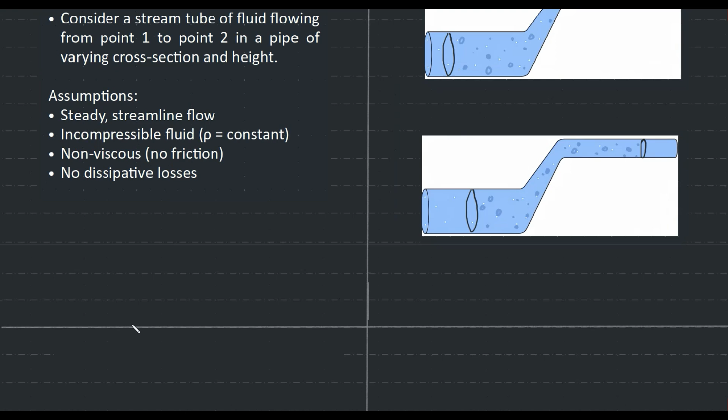So let's look at Bernoulli's equation. We are proving that with the help of the work energy theorem. Let me use this example so that this makes more sense and the transition becomes easy.

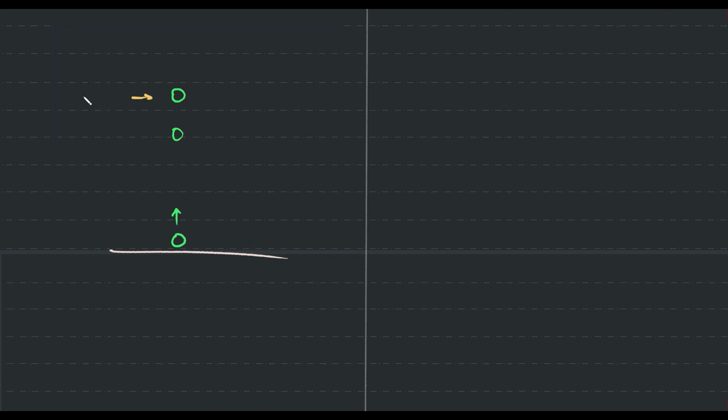So what I'm talking about is throwing a ball up in the air, say on the surface of the moon. This is the top, and this is a journey, it goes up and down. So what is the relationship between kinetic energy and potential energy as and when it moves?

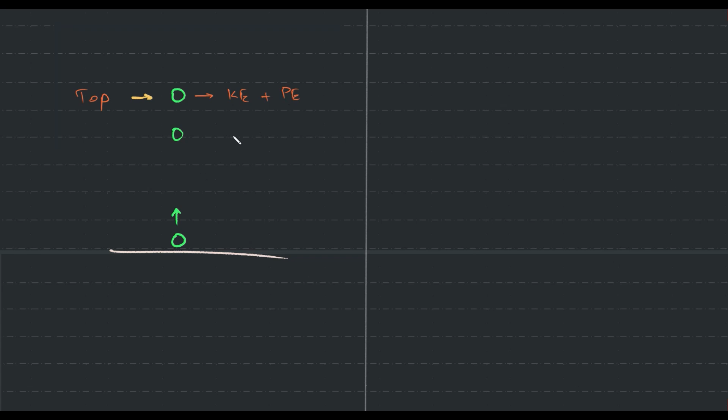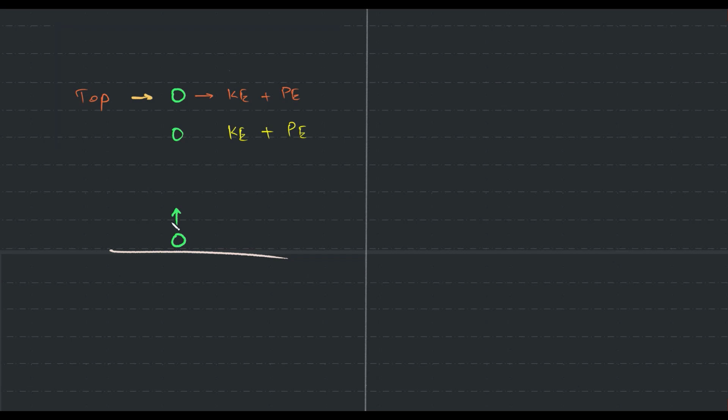Will the kinetic energy and potential energy remain the same throughout? No, right? Individually, they don't. So the kinetic energy value will not be the same at the top in comparison to the kinetic energy and potential energy at any other point. But the total is constant. And this keeps changing, this also changes. Do you guys agree? Do you remember all this?

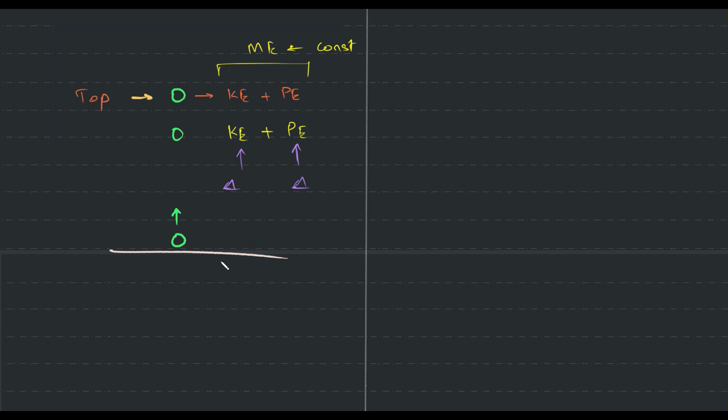Similar to this, okay, extending this idea, we have an ideal fluid moving through a pipe. So here your gravitational force is acting on it, and there is a change in height. And with all of this, you have these particular changes happening, but of course there's one thing that remains constant.

When we talk about Bernoulli's equation, what we are dealing with is an ideal fluid, which is seeing a steady streamline flow through a pipe which is varying in size and height and everything. Okay, guys.

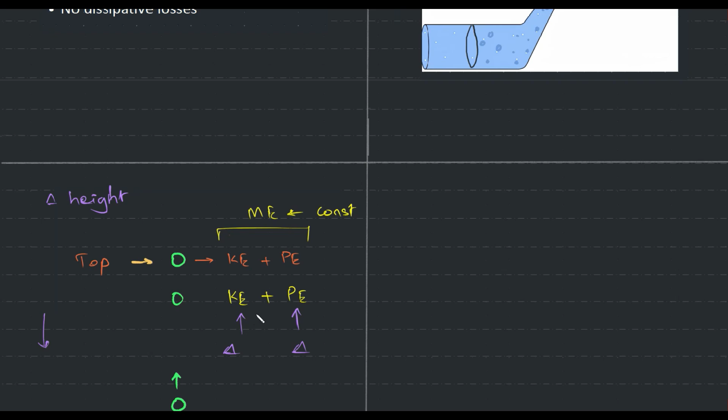So what happens to the energy? Is there an energy form change? Do we see, like here, how we saw the kinetic energy and potential energy increase and decrease? Similar to this, is there an energy form change that we see over here? Relating that is your Bernoulli's equation, and we are proving this with the work energy theorem.

To put it in simple words, say our system is made up of all the particles starting from point 1 to point 2. So this is when you started observing, and this is after some time t. You can see that the bunch of particles is moving to the right. So this is 1 to 2, 1 to 2. This bunch of particles has moved to the right, so it is flowing to the right.

Okay guys, so when this happens, what we are trying to see is what happens to the energy. Will the energy, the different mechanical energy that we get to see, will it remain the same? Will it change? That's what we are trying to understand.

Okay, that's the agenda. So to do this, we are considering a stream tube of fluid flowing from 1 to 2 in a pipe of varying cross section and height. So we have different cross sections and heights. Let me kind of streamline this a bit. So we have a pipe whose area of cross section over here is A1 and this is A2.

So this is when we have it at 0 seconds, and this is after some time t, delta t. Okay, and now we have to also consider that this is steady and streamline flow, and all of this is incompressible fluid with density rho. It's non-viscous, so there's no friction, there's no loss of energy in that form, and there's no other form of energy being lost, right? Energy is not lost in any other form.

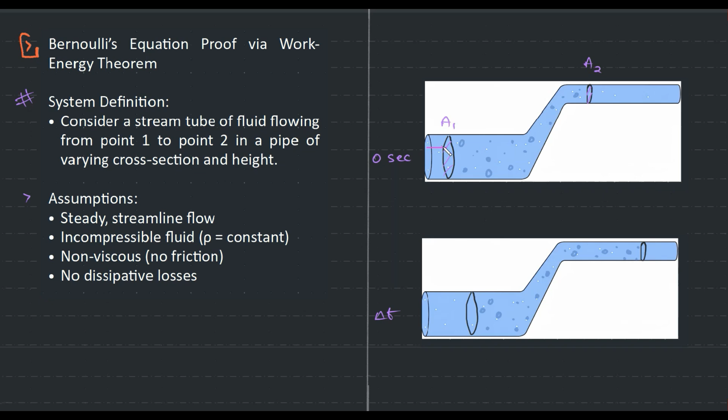Okay, so the first thing you need to understand over here is this system is exposed to two different forces, since this is fluid, right? You know that fluid will exert pressure. Let's call this P1. And here also it will exert pressure, let's call it P2.

Do you guys agree? There's a continuing force acting over here. And of course, to oppose the motion over here too, because the fluid behaves that way. Remember, if I keep any surface inside a fluid, it will exert pressure in all directions. So using that fact, can you see that this is experiencing pressure in all directions? The system of particles is experiencing pressure at both ends.

Quite simple, right? Because of the other set of particles which makes up the remaining of the fluid, the surrounding, per se. So if this is my system, I'll just write it lightly. If this makes up my system, this would be my surrounding, and of course here too is my surrounding. So my surrounding on the left is pushing it forward, that's why it's moving forward. The surrounding on the right is also pushing it, but it's pushing it back.

Okay, till now everything is clear. Post this, it's very simple. Till now whatever I said has to be clear. You have a bunch of particles that is connected to a tank, and the tank is pushing it forward, so it moved forward. And the area of cross section is A1 and A2, and the pressure that the system experiences at one end is P1 and the other end is P2. So because of this, the system has moved forward. It has gained some energy, there is a change in energy.

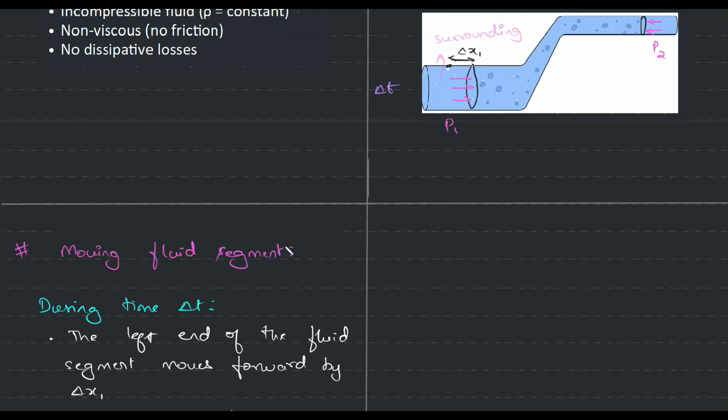Again, see guys, how we saw the ball moving up and down - similarly, this is just a set of particles that is moving. Then at the right end, what do we have? It moves, the system moves, the particle moves by delta x2. So delta x1 and delta x2, will they be same? It was here and it went to this point, so this is delta x2.

Okay guys, will they be same? Oh yeah, sorry, let me come back to this. Is delta x1 same as delta x2? No, right? Why is that I have drawn it different? Why is delta x1 not equal to delta x2?

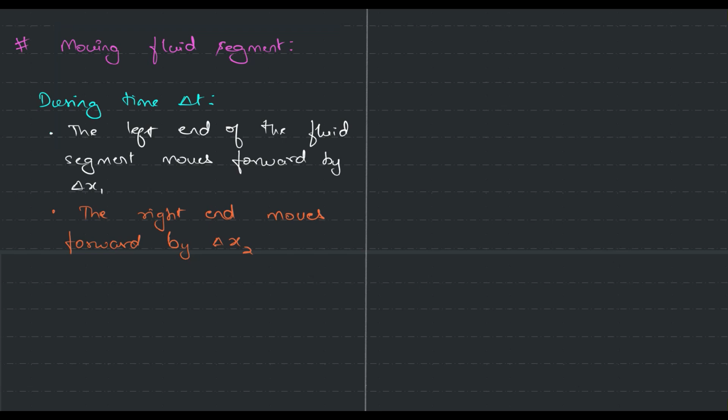The volumes entering and leaving must be equal. Why? Because the fluid is incompressible, and with the help of the continuity concept that we saw, the volume has to be fixed. Basically, it's common sense - if you have to make space for 10 people and if the place is packed, all the chairs are occupied, if 10 more people come in, 10 people have to go out, right? That's your continuity.

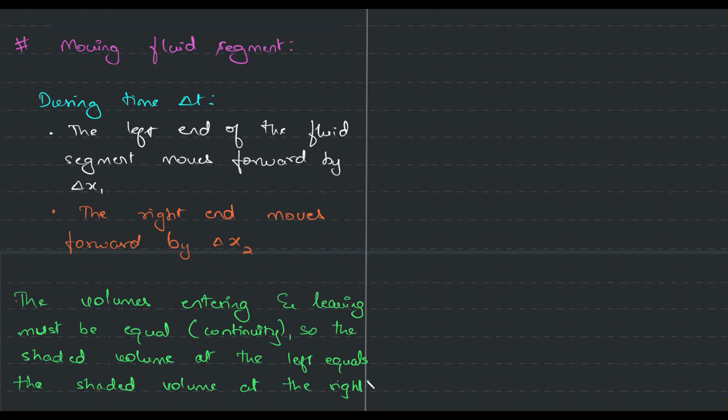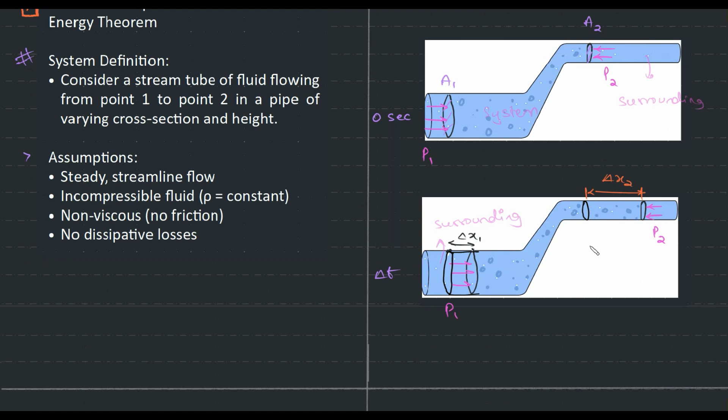So the shaded volume - I'll be changing the diagram actually - at the left end equals the shaded volume at the right. So V is volume, by the way. A1 delta x1 is equal to A2 delta x2. So basically, let's finalize this - this is the left volume and this is the right volume, so you can finalize this as the diagram. This is your area of cross section A1 delta x1. This volume has to be equal to this volume basically. It has to be so, there's no other option.

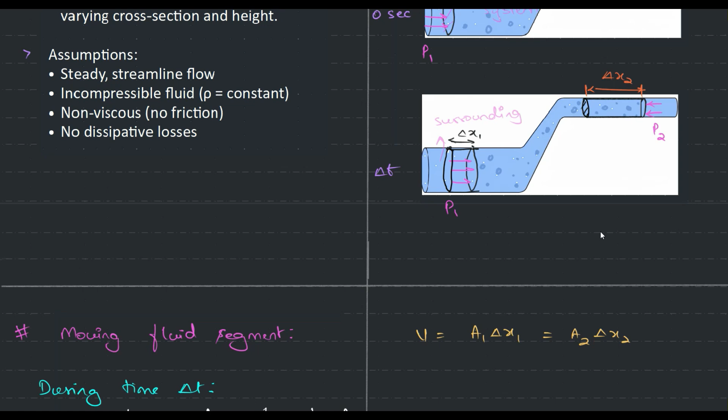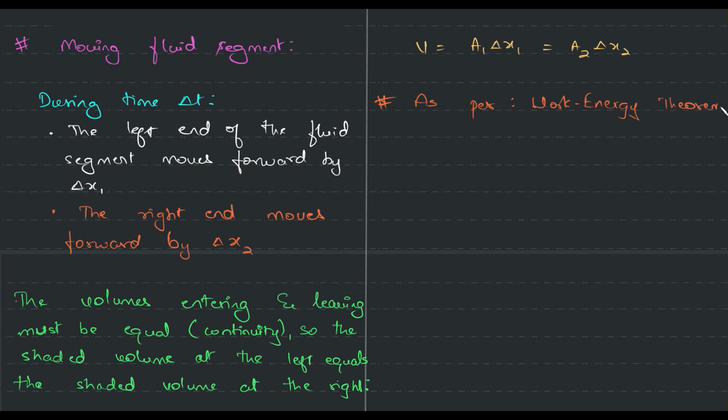Agree? Now, with this understanding, let's start with the work energy theorem. What we're looking at is: work done by any external force will change the mechanical energy of the system. This is a possibility. And when we discuss change in mechanical energy, we're looking at change in kinetic energy plus potential energy.

So this is nothing but kinetic energy at 2 plus U2 minus the kinetic energy 1 plus potential energy 1. So 1 is over here, by the way - so this is 1 for us. I should finalize this, right? And this is 2. Let me write 2 over there, it's not visible. And this is 1, and this is 2.

Okay, so why is that I'm talking only about this section? Why not in between? In between, you can see that nothing has changed - we already had this section of fluid before and after, so those values will cancel each other, so we don't have to discuss that. Again, I repeat, the in-between region is from here to here. This, which is part of the system, is not going through any changes. Agree? They're not going through any changes, so we are ignoring that. So the change in the system's energy is to do with part 1 and part 2, the difference between them. This is the only possibility.

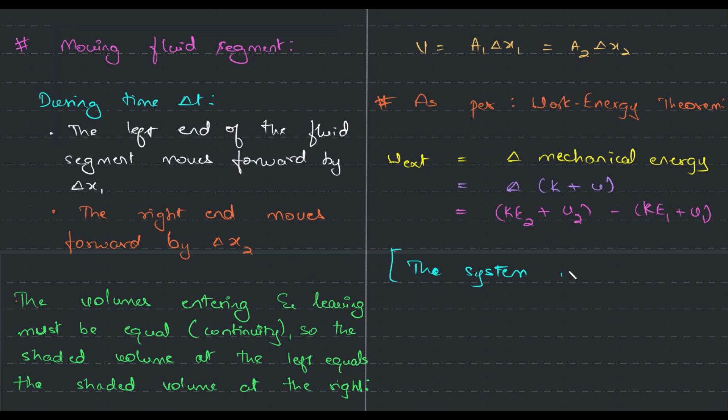Okay, so in between, what is happening? In between fluid, the system - let's write the reason as well - the system in between 1 and 2 does not see any change in its energy, so we can ignore that. Actually, it's a very simple derivation, just that I am explaining it a lot.

Okay guys, now let's take one by one. So we have LHS, that is work by external force. So here the work is done by the surrounding, of course external sources - by the fluid on the left and the right. So the left is pushing it forward, the right is pushing it back actually. So we are going to make use of: work is equal to force into displacement.

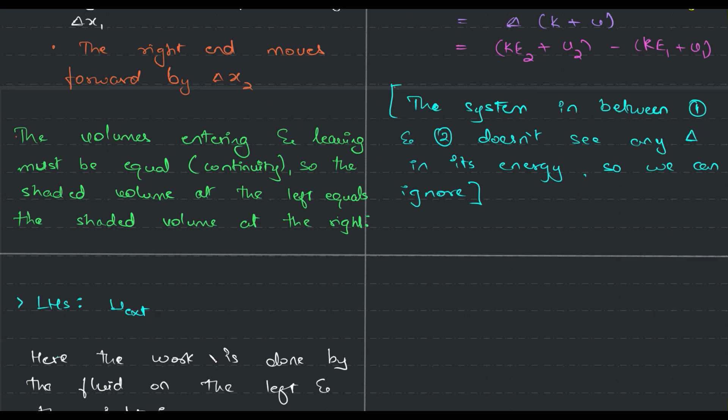So at point 1, what we have is work 1. Force is in the form of pressure into area, and displacement is delta x1. Agree? But this is nothing but your volume V, right? We already discussed that, that's why it helps. Okay, it's here, so this is 1, so this is from 1.

Now at point 2, we have P2 into A2. This is force, this is your displacement, while this makes up your volume. And so we have V again. So this is your LHS, while my RHS will be half m V2 square plus m G H2.

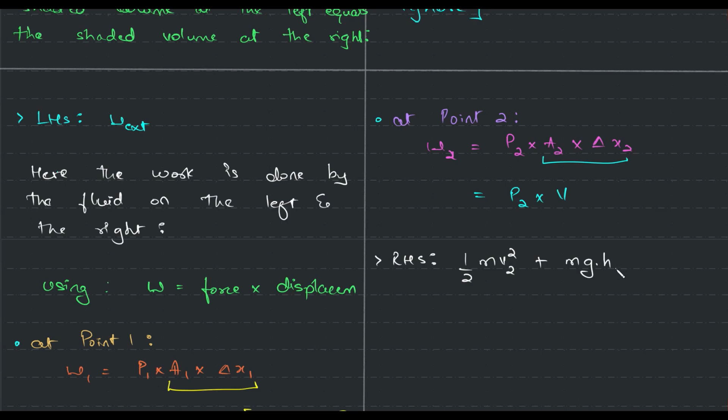Okay, this I have not described, let us talk about it now. See, if I take up any particle over here, it will have a certain velocity, right? It's moving, so it will have velocity, that I'm calling V1. And particles at this part will have velocity, that I'm calling V2. Okay, so we're finalizing this. So where do I write it though? Don't have space, so V1, V2. Not exactly an ideal thing, but I also have to show you guys the height, so you also have to do a bit of jugaad.

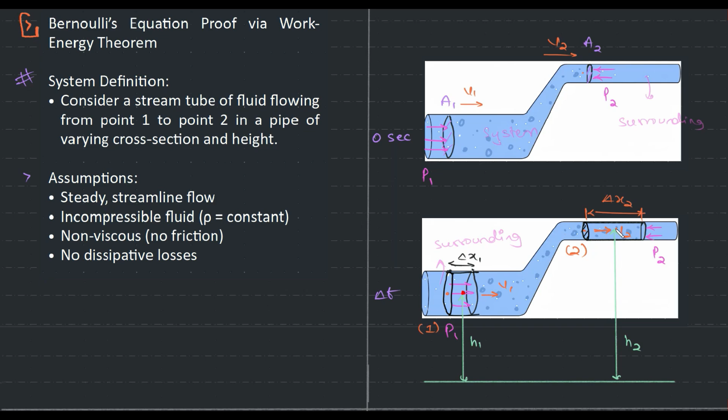So it has gained potential energy as well, right? On an average, this has been your height. Okay, so this will average out to this point, and all of this will average out to this point. That's why I marked in the middle, so you can see I'm marked in the middle. I could have taken a better color combination. And so we have these values, right? They are moving with a certain velocity, and I've written that.

That's it, minus half m v1 square plus m into g into h1. Now, mass is equal to density into volume, so on substituting that, what we have is half rho v.

Actually, you know what, let's not waste a lot of writing. Therefore, okay, external work is equal to change in the kinetic energy plus potential energy, which will be equal to P2 into V minus P1 into V. Okay, sorry, my bad, oh yeah, one thing I missed out, my bad, let me correct that.

One small thing, my pressure is in the opposite direction to that of the displacement, guys. Movement, guys, so here I have to consider negative, the reason being the force and displacement are in opposite direction. So let me explain this. See, the particles are moving to the right, the pressure is pointing to the left, so work done by this pressure will be negative. That's all I meant, so that's why this is negative.

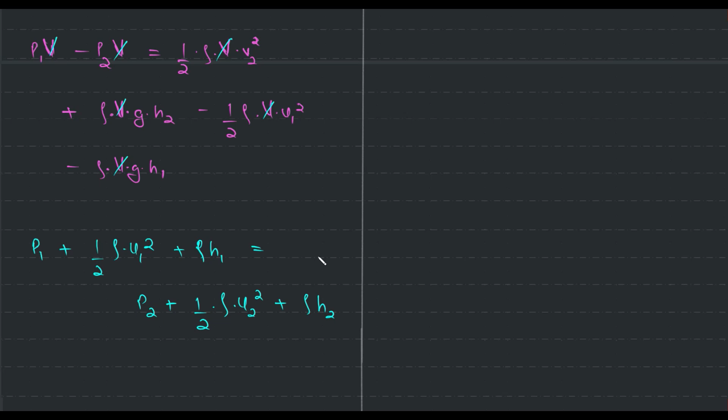And so you can see that the pressure, the kinetic energy and the potential energy for an ideal fluid flowing through a pipe, okay, a single pipe in a streamlined manner, the pressure, the kinetic energy and the potential energy will remain constant. Okay, will remain constant, that's the whole funda over here, and that's your proof. So you guys can ignore this diagram. I think nothing else has been missed, so you can just make use of that. Yeah, I think now it's okay.

Again, let me revise it once. So a bunch of particles is making up our system, the particles are moving from left to right, so there is change in shape and height and everything. So we are covering up all the possible scenarios. This movement happens because there is a pressure difference, if not, then the fluid will not flow. So in this particular case, there is change in potential energy, there is change in kinetic energy, and this change has occurred because of the pressure difference, so the work is done by the pressure.

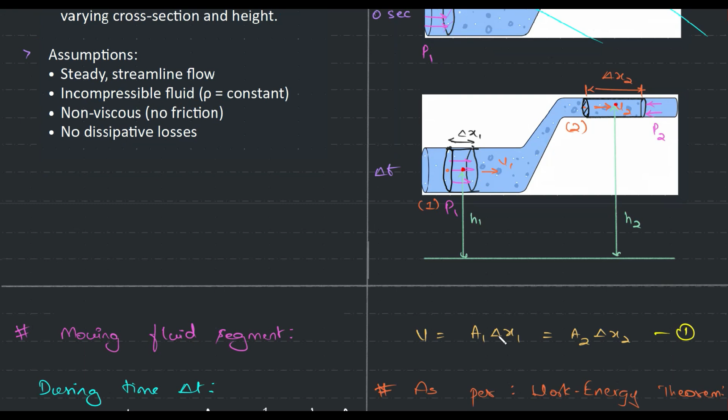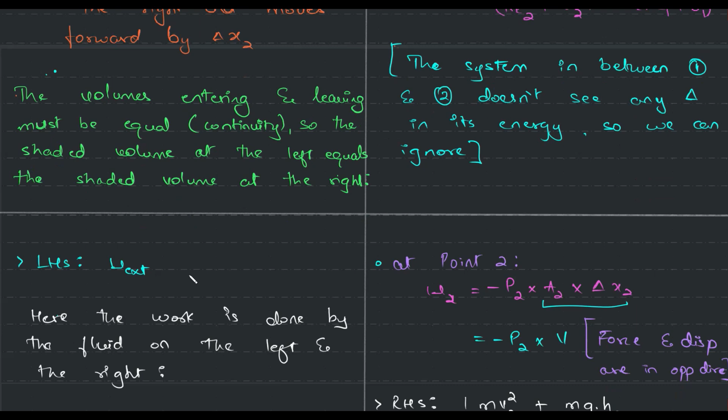And we are equating, it's a simple expression. The external work will result in change in the mechanical energy of the system. So based on this very fact, we are deriving it, and this is a very simple expression, this you know of. And the work is nothing but force into displacement, and kinetic energy and potential energy is half mv squared, then mgh and all of that. Substitute it, simplify it, and you get the answer.

Very simple thing, but yeah, I took time to explain why this happens because I've seen many kids, they don't understand exactly what is happening. Actually, I planned for almost 2 hours to come to this point, as in how to tell, what to tell, especially the starting part, everything else is quite simple. Okay guys, so it took some bit of planning. I hope I was able to deliver. Now it's time for you guys to pause, have a look, and learn properly.